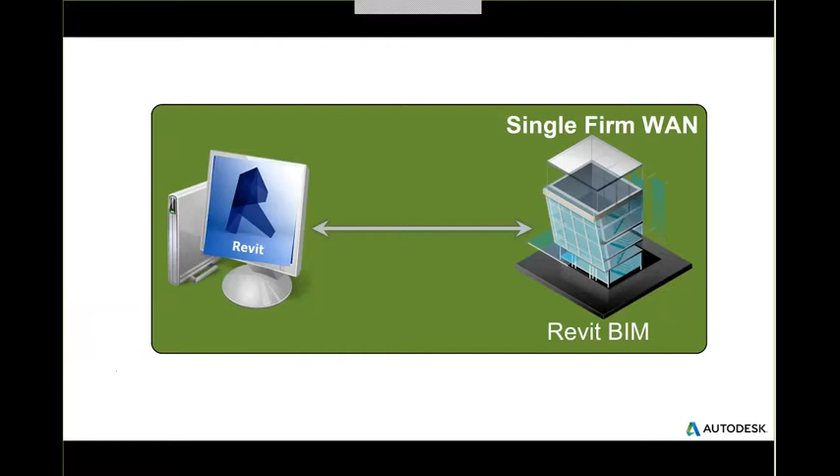So C4R is Collaboration for Revit. Revit is living inside the cloud. So the central file right here, when I say Revit is living inside the cloud, it's really the central file.

This central file is an essential tool for those who don't know Revit. Unlike AutoCAD, Revit has the technology where multiple people can work on a single file at the same time without overriding each other's data. That's a pretty big deal. It's much different from AutoCAD, where you do a lot of DWG linking and XREFing. Yes, you can still do that inside Revit, but Revit has central file capabilities.

For those who use Revit today, this is the part that's new to you: you can have your central file living in the cloud. With architecture firms, this is typically where architects ask us how they can get their engineers closer to them inside their project. In this case, architecture firm A has two offices, maybe one in Boston, one in Chicago. They're able to do that today with just their servers, typically using Revit Server with a private wide area network.

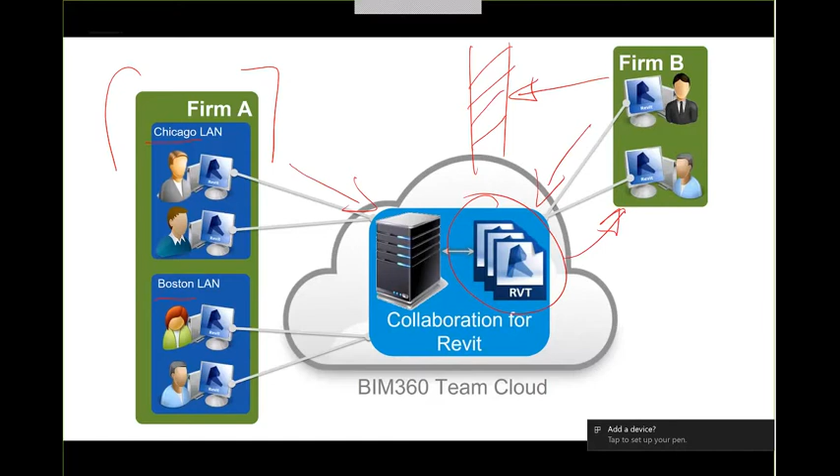But usually firm B, the engineering firm, could never get into their central file with them. So what Collaboration for Revit does, because the central files live in the cloud now, is let each firm go in through the cloud to access the central file, which is then pulled down from the cloud as a local file. Make no mistake—each person on this file can work on the exact same file at the exact same time.

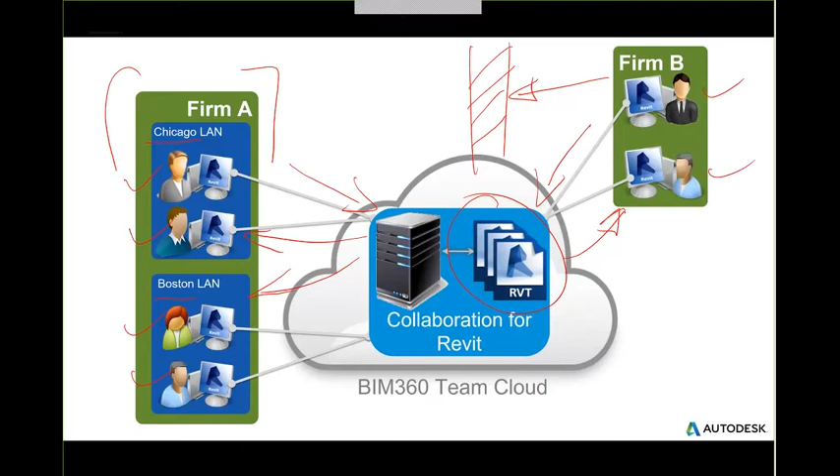Objects become locked out to individuals who access them, like a wall, a door, or a window. When I put in a wall, or put a door into a wall, it will lock those objects out to me until I save it back to the central file.

So in Collaboration for Revit, here's what it used to mean in the past. For firms to do this, they would have to buy servers, and use Revit Server software, which was free, but they would still have to use it. To manage other files like DWGs, doc files, and Excel files, they would use additional things like FTP storage.

Bringing it all together, the secret sauce was typically a VPN connection. To support all of this, there was typically an IT staff involved at the root of it all, and the poor project manager down here had to take a giant leap of faith to make sure everything was up and running the whole time for their team.

But now with C4R, the central file lives on the component called BIM 360 Team—that's where the central file is going to live, in the team cloud. The C4R tools are installed on each computer for anybody who needs to author in Revit.

And that's something really important to know: the licensing for C4R is per user. The question you'd ask yourself is how many people in our firm need to author in Revit on the central file at the same time with other people on this project. If the answer is 4, you'd get 4 licenses of C4R. The C4R licenses include the team cloud as well.

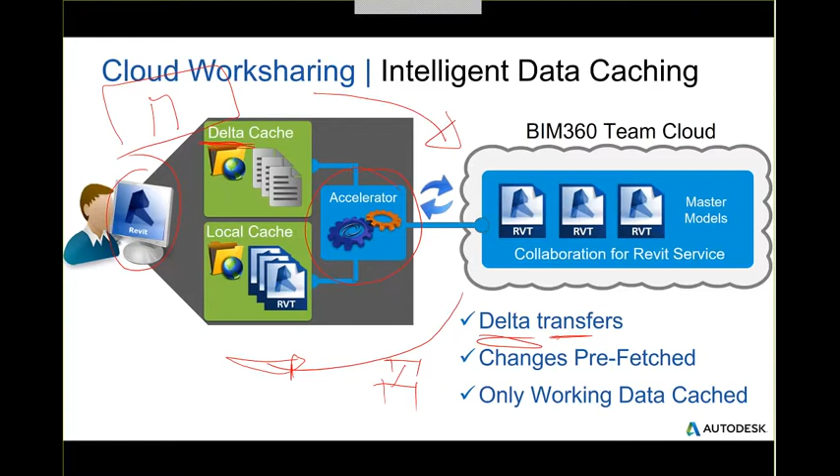You don't have to worry about that stuff. I'm just telling you in the background, this is what's happening. You just need to know that you can do your work.

Now, as far as the communication goes, this is part 2 of Collaboration for Revit. This enhanced communication really puts a tool into Revit that allows for communication. Let's face it, Revit isn't suited for communication today. I know people use Lync, Skype, some kind of messaging tools, but what we built into Collaboration for Revit is a tool called Communicator.

So any people inside your firm or outside your firm, when they're running Revit and they're signed in, you will see them logged into the Communicator. And if I log into Collaboration for Revit, there's my sunny smiley face right there, and I'll get to read the chats which have been happening throughout the communication window.

We can have team chats, we can have direct one-on-one chats. In this case, because I can see more than one person chatting, I'm part of a team chat, as well as being associated to more than one project, since with Collaboration for Revit you can work on more than one project at a time. If you buy the license for a year, you get to work on as many projects as you wish, with no restrictions.

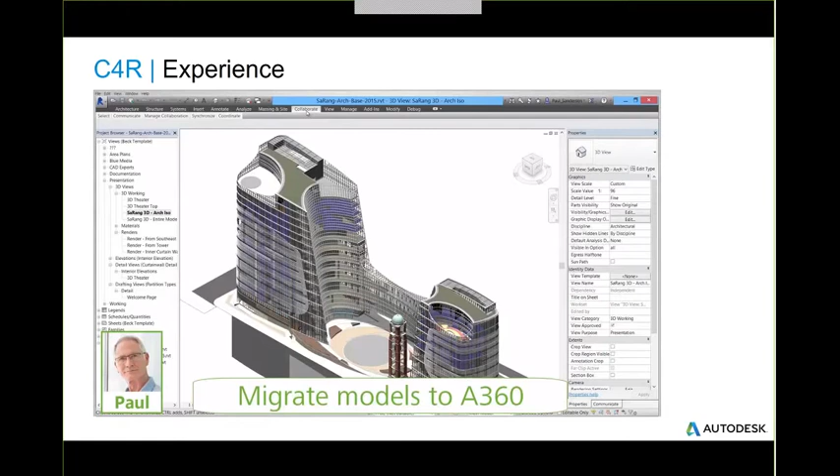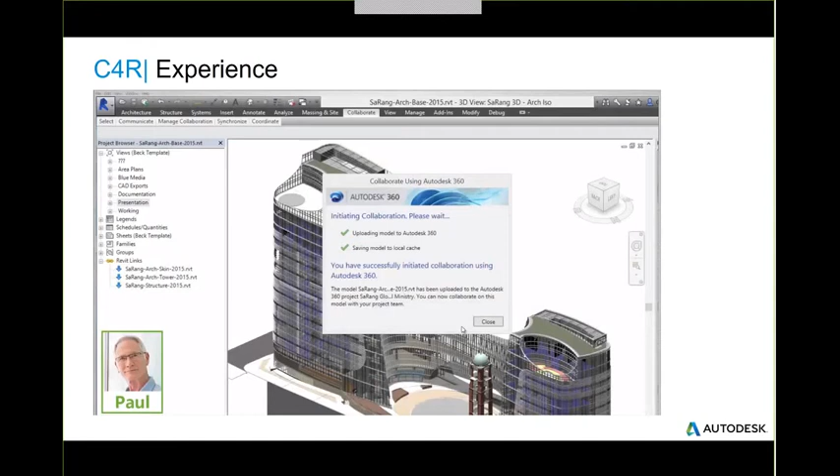So overall, the process looks like this: you save to central, choosing a project to which you're saving, and then Collaboration for Revit uploads that file. I'm going to show you that live, as well as showing the overall user experience. Now, specifically, I wanted to show you one more thing here. Let's bring up this file right here.

So C4R includes Team, but you folks out there that are not necessarily using Revit, and you have principals and directors who don't use CAD, but they want to access it, so they use things like PDF viewers that are not, let's say, Autodesk flavored. Team can really benefit everybody in a number of different ways. And this is where I really want to put the brakes on for everybody that's using siloed tools.

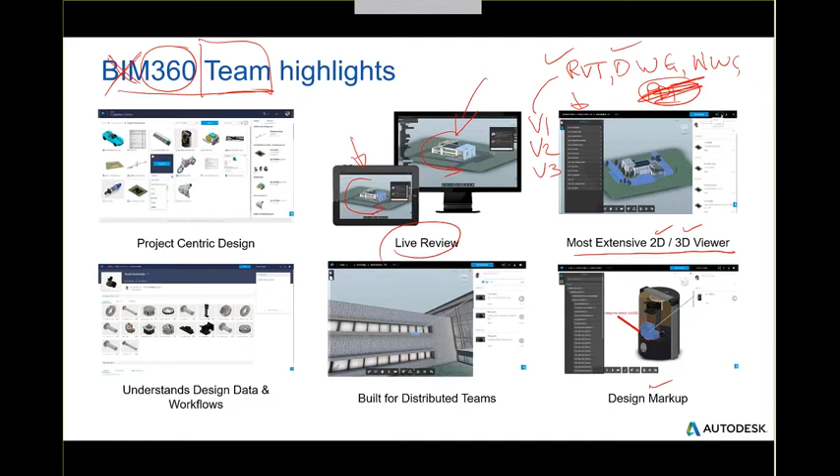One of the other competitive tools out there has a very similar live review process. We have the exact same thing in Team, where you can view the model, and as I spin this model around, somebody else using an iPad will see the model spin, because their camera perspective is my camera perspective, and we can slice and dice the model up and comment on it. And in virtually any format as well.

Again, you don't need to know this, but it's running Navisworks in the background. It's not a plugin, it's just a simple web viewer with an iOS application, which will come out in Android as well very soon. But it's iOS right now for your phone and your tablets. And that's the nice thing. It was designed for iOS in the beginning. And the simple tools are all common across these platforms. Drop dead easy to use.

And the tools of iPad and phone have an online, offline capability. If you go to a project and you don't have Wi-Fi accessibility, you can save these project files to go offline. So if you're in the airport as well or on a plane.

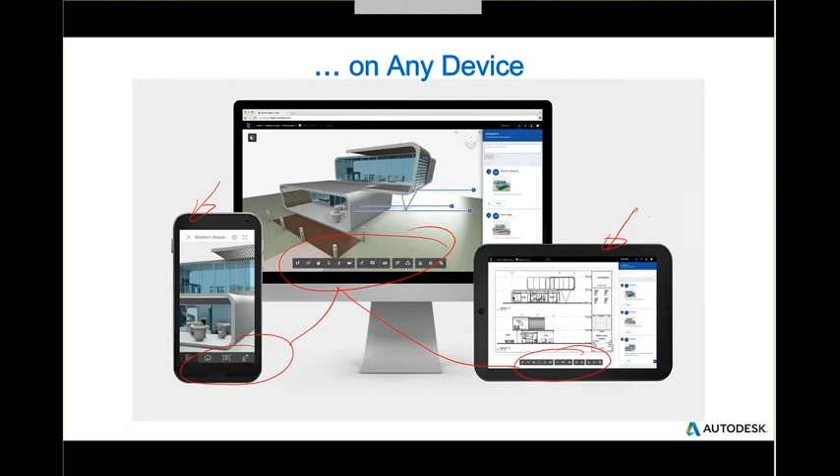So I'm going to skip through this and say what's included. What is included is this central file capability, working on a central file in Revit from the cloud. When you buy C4R, Team is included in this license. By the way, you start at 500 gigabytes per license, and the licenses can be pooled to pool data. Moral of the story here is, I don't think you're going to run out of data storage.

The Communicator chat is included. That Communicator window where we're doing the chatting, the save to central syncing. This model management and versioning is built into Team itself, so that's included. And the scalable licensing. This is a big deal, and essentially the scalable licensing means when you buy subscription licenses, you, as the administrator, allocate licenses to individuals in your group.

When or if you have people leave your office, maybe they go on to a project or a new job, you can revoke the license and then re-administer it to somebody else. So essentially, there is a return on investment with this, and what we say is if C4R can save just 10 minutes a week per person, it would literally pay for itself. Okay? So let's skip into this and take a look at what C4R looks like live.

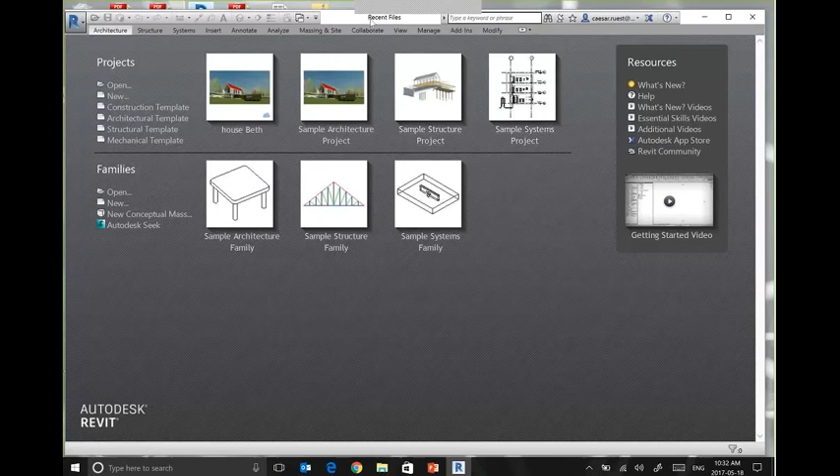So this is going to focus on the Revit side first. For those people that are AutoCAD, just stay tuned with me because I'm going to show what the Team side looks like in a moment. But this is Revit, and you can tell that I've got C4R on my system as well as I've started to use it. This file has a small moniker with a cloud, and you see the path?

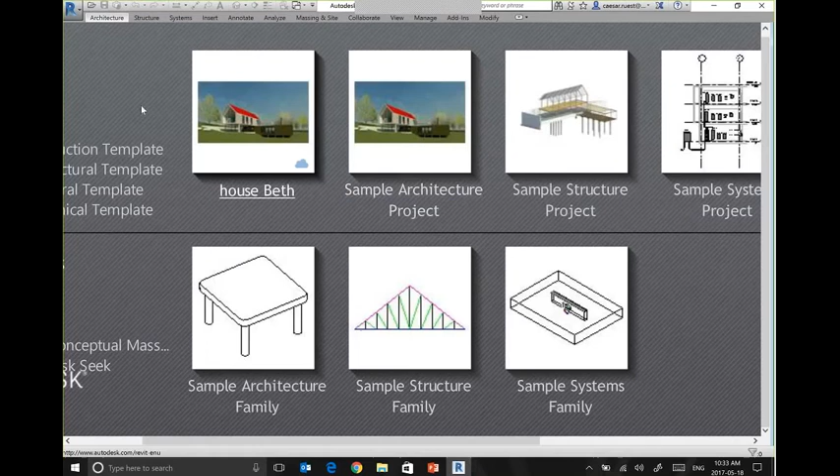So the path of this is BIM 360, the project of Skyscraper. The file in the cloud is called House Beth. This file is my C drive, and you can see it doesn't have the little moniker down here as well. And the other thing is with this, when I click on open, you'll also see here, because I have C4R installed, it'll put the shortcut of BIM 360 Team right here.

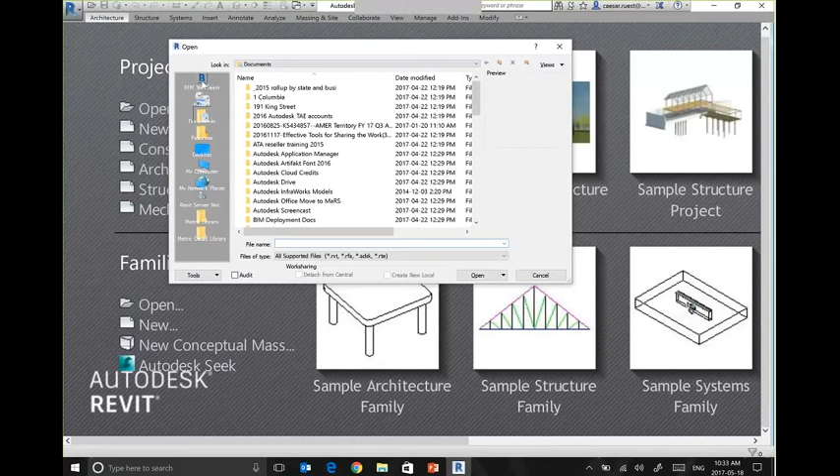So when I want to do file linking or open up files from the cloud, the files have to be in Team coming through Revit. But that being said, I can access Team right through here. Now let's open up this sample architectural project. This is a demo project that comes in every license of Revit, so nobody should be afraid of this project.

We have project sizes, by the way, of hundreds of megabytes in C4R, as well as small megabytes in C4R. We can handle very large projects down to small and medium-sized projects, so feel comfortable with that. This project is all set. Let's pretend that I just worked on this all morning, and I want to share this with my team to start engineering it mechanically as well as structurally.

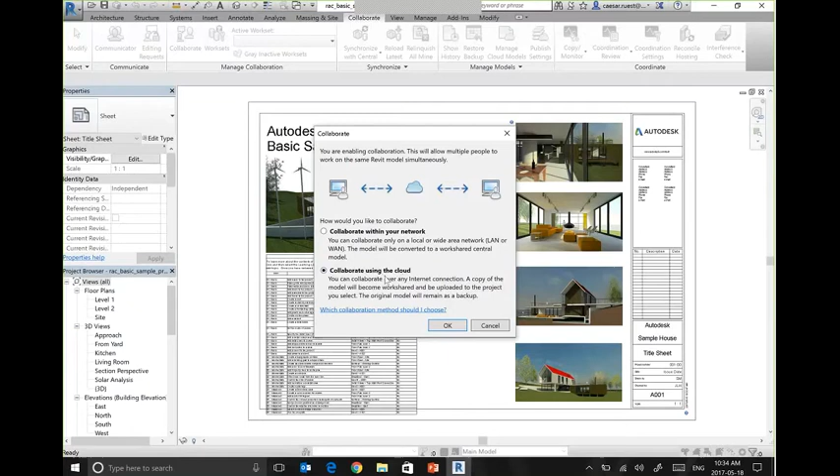My collaborate button will expose the collaborate function as well as the communicator function. So I want to collaborate. And collaborate will institute collaboration using the cloud. This is the beginning of C4R right here. And I'm going to say OK. Now, I want to rename this, and let's just call this House Rolo.

And it's asking me at this point, okay, Caesar, which cloud project site do you wish to send this to? So I have 1, 2, 3, 4, 5 project sites in the cloud. I have this skyscraper project in the cloud, and I want to send this file from my computer to the cloud site called skyscraper. And I'm going to initiate that.

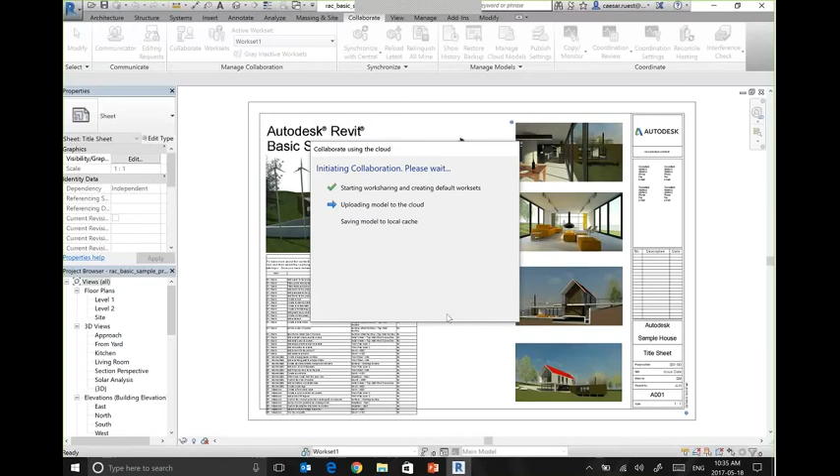So what it's doing, it's making this into a central file. It's creating the default work sets that get made with central files. You could also start from a central file with your own work sets and publish this to the cloud. But then once it pushes it to the cloud, it's going to then pull the model back to my computer as that linked central file, but it'll be a locally cached file on my computer, and we're done.

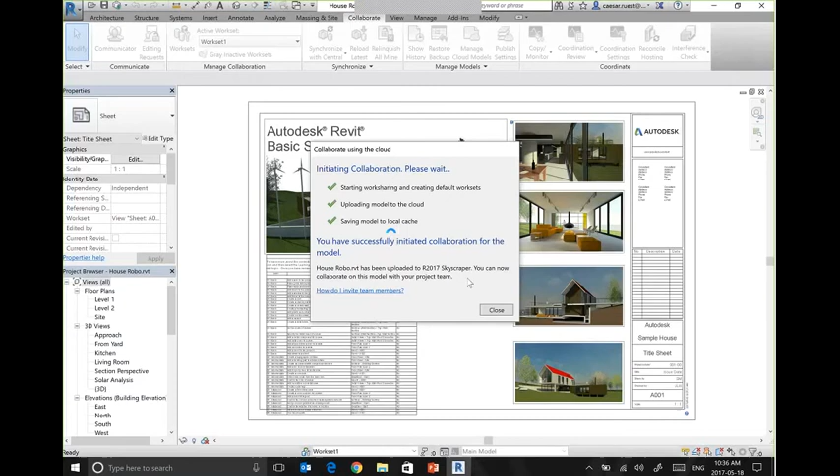So at this point in time, people think, okay, is Caesar working on a file that's in the cloud, right? And the answer is no. I'm always working on a locally cached file on my computer, but the link, the smart link, is to the cloud.

So whenever I would go and change the roof, I would be changing the roof model on my local file first, and then when I click on this icon right at the top here, this Save to Central, then it would update the roof in the central file for those to see it in my team. That's how collaboration for Revit works. Now, before we go to the cloud to show you where that file is, let me show you Communicator.

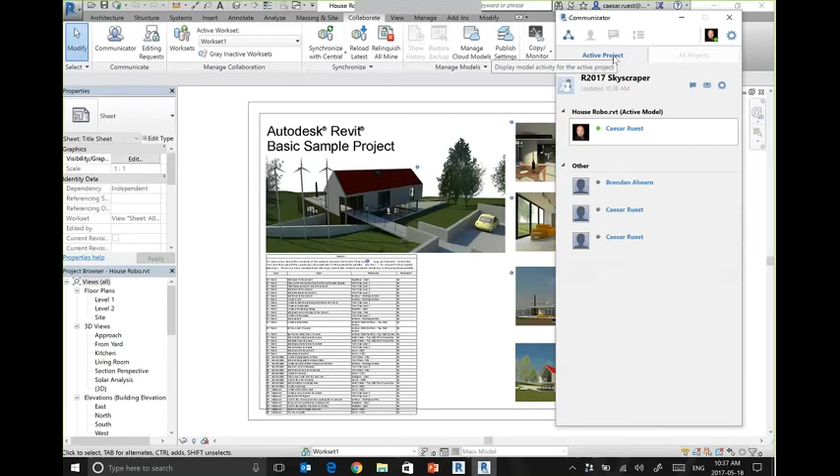So again, built into C4R, Communicator is only a Revit tool. It's not an AutoCAD tool. In this case here, you can see I'm online, obviously. It's got me as green. I don't have any other people inside of this project. My project name is Skyscraper. That's my active project. If I go to all projects, these are the associated projects to which I'm accorded to.

So for example, let's go into this Audubon project. And these are architects and engineers from different offices all on this Audubon project. And you can see, I can chat to one of these people inside of the project. I can send a message, an email message to everybody in this project.

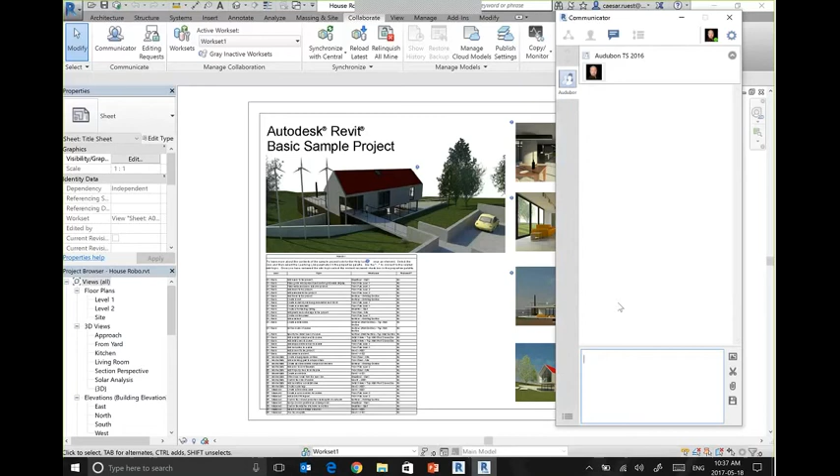Now, whenever I dig into this project, this is where the project becomes highlighted here on the side ribbon, but this is the historical information that you see. So when you dig back into the project, you can see all of these screen captures. Okay, the deadline shifted. Joe said this way back last year, and he did this screen capture.

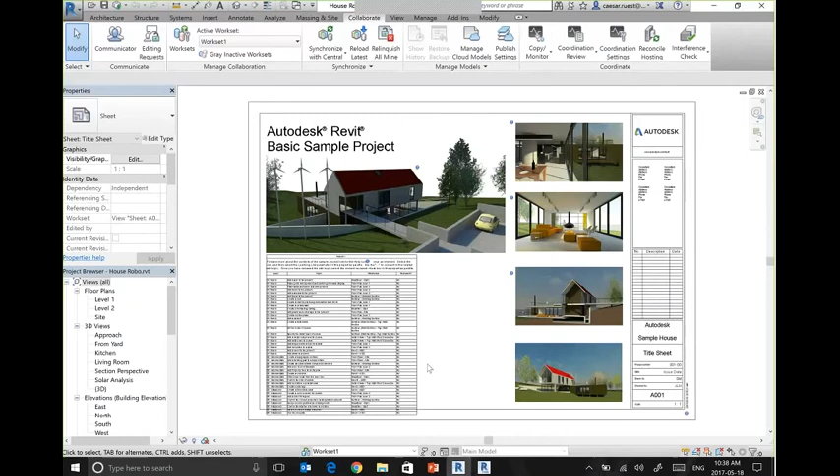And to do a screen capture, you just kind of zoom in to wherever you want to be on the screen. And then down here, you'll see these tools. You can send an image from your hard drive. You can do the screen capture. You can send a file, literally send like a PDF file or a document file right through this chat window. And then you can also export this chat history for posterity's sake.

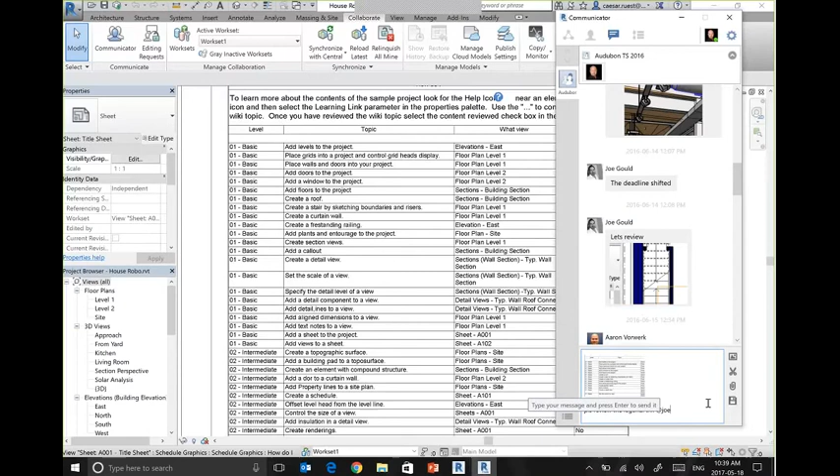So let's capture this screen. Let's capture this chunk of the screen and capture. And now we can say whatever we want to say, like please review the legend. And you can do things like @Joe or something like that, so that Joe knows that I'm talking to him. I could have sent this chat directly to him, but I'm sending this out to the entire team. So that's the chat window.

And then the timeline window is where you can see the sync to central. So like I said, as long as you're in a project, so I'm in this R 2017 Skyscraper project, anybody that saves a file to this project from Revit, you will get to see which file they're saving to Central and who is saving it, as well as the comments they are adding every time they sync to Central. Okay, so this is all here historical, which is actually very fantastic.

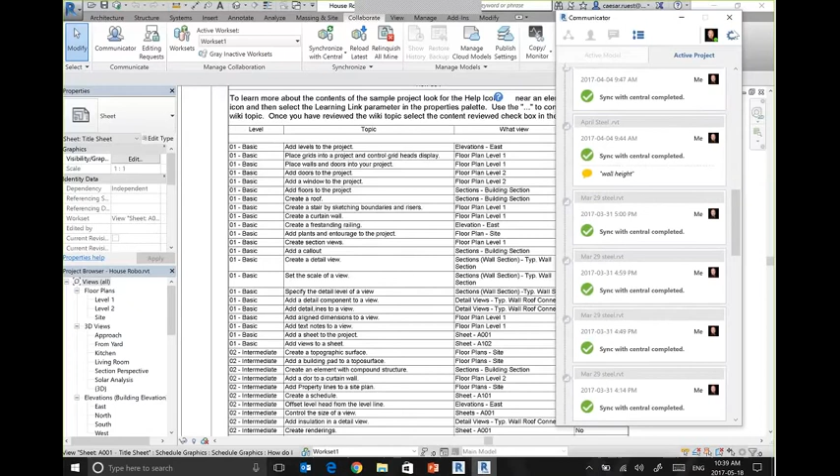You don't realize how good the tool is until you start using it. You kind of wonder, am I really going to use that? It's kind of like a new feature on a car. Am I really going to use the keyless entry of my car? It seems kind of wishy-washy at first, but as soon as you start using it, you kind of wonder, I couldn't have lived without it.

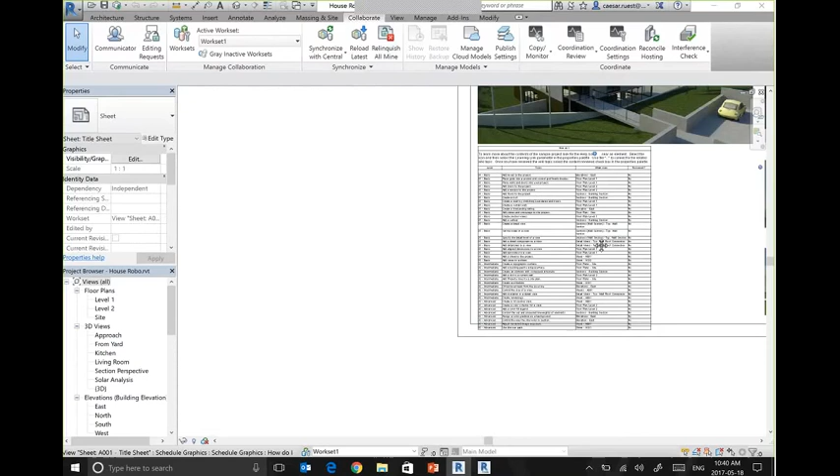Now that's the Communicator. And here's the last thing I want to show you within the Collaborate tab. Those of you that are architects and engineers, you might really appreciate this, specifically in Revit. You know that in Revit, you create sheets, and they're part of the entire file. So my sheets are all here, sheets 1 to 5. Now, as an architect, I would typically work on one sheet and not necessarily complete it. So what you can do is actually publish your Revit file with only those sheets and those 3D views that you want to share with your people.

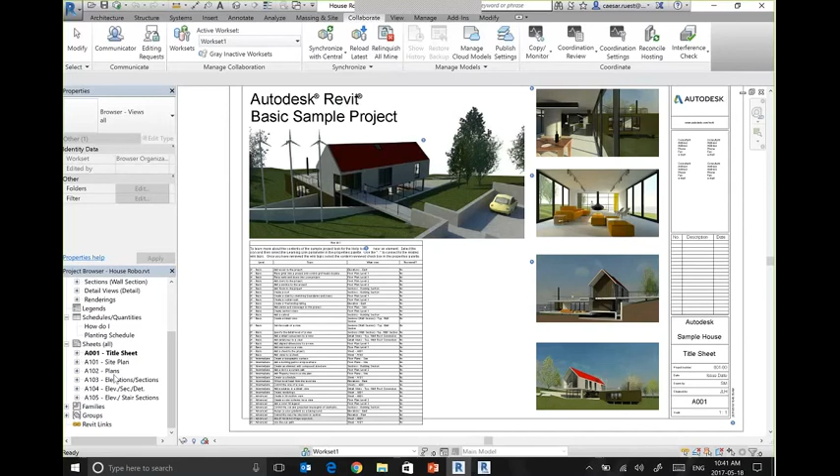So publishing is how the file gets versioned inside of Collaboration for Revit. So if I wanted to publish only the title sheet and the plans and the 3D views, like this 3D view right here, then only those people who have access to Team will only see the sheets called Plan and this 3D view. The publishing tool is your best tool for doing progress sets so that people who are doing review only see the data that they need to see. That's really important. That's built into Revit today, but it's highlighted here inside of the Collaborate tab.

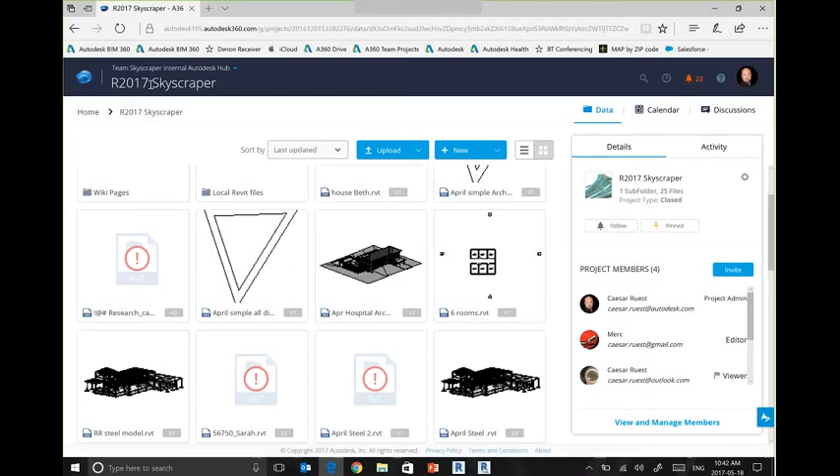So let's fast forward. Let's gain everybody's attention back. Everybody that's AutoCAD, everybody that's Revit. This is more important. If you have anybody that doesn't want to touch AutoCAD, but wants to review drawings and mark up drawings, they need to see this. This is Team. This is the project that I just published this out to. So for example here, my project called Skyscraper, you're looking at the BIM 360 Team website.

And like I said, if you don't use Revit in your office, you can still buy BIM 360 Team separately instead of buying Collaboration for Revit, because obviously you don't have Revit. You would buy Team separately, and you would use that on your AutoCAD flavored projects. Okay, so Team, when you jump into it, these are your Team hubs. So I have my own personal hub. I have a hub which I'm also associated with. These are the projects in my hub.

Inside of each of these projects, there are different project members. So I made this project Skyscraper. Here are the project participants. I have Caesar, I've got Merc, and then I've got this other guy named Caesar, and then I've got Brendan. And you can see their permission levels.

This is how you view and add new users. You just click on invite, and you just send them an email. Blah, blah, blah. And I want to make you an editor or a viewer. It's drop dead simple. Okay? If you want to know what the difference is between the two, you click on the question mark.

So viewing lets you do commenting, viewing, posts, accessing conversations. If you want to do shared files and stuff like that, then you need to be editor: moving, copying, rotating, and inviting other people, editor. And then project admin lets you actually approve people coming into the project.

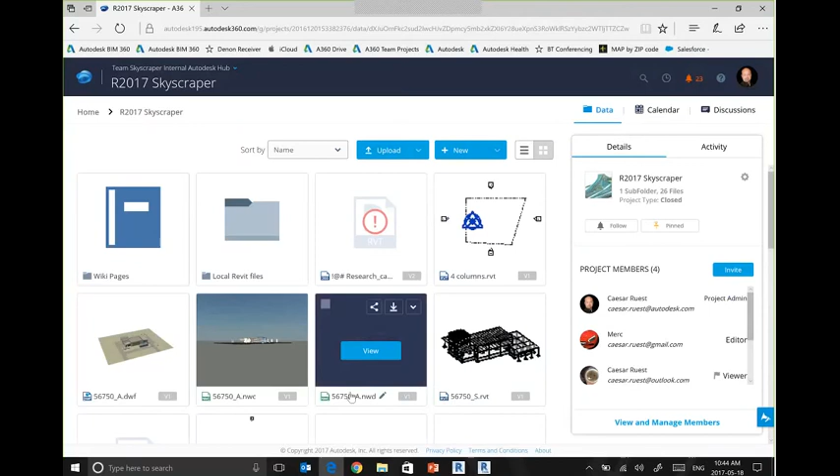Now, the nice thing about Team is you can see it thumbnailed. This is a list view, but you can also see it thumbnailed. And inside of here, I've got a Navisworks file. I've got my Revit files, a DWF file. I've even got the AutoCAD files in here somewhere. There's my Bethlehem. There's my house robo file. You can see the preview of it.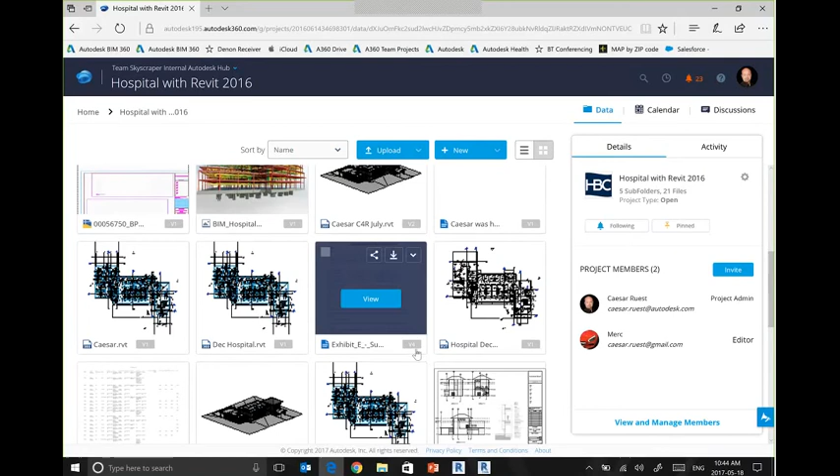Let me go into a file which has a little bit of a history behind it, because right now that was just a freshly published file. Let me go into this hospital. So here's some AutoCAD files. You can see the title blocks kind of showing up. There's a JPEG. Oh, here's a Microsoft document file, and it's on version 4. Here's a Microsoft Excel file, and it's on version 2.

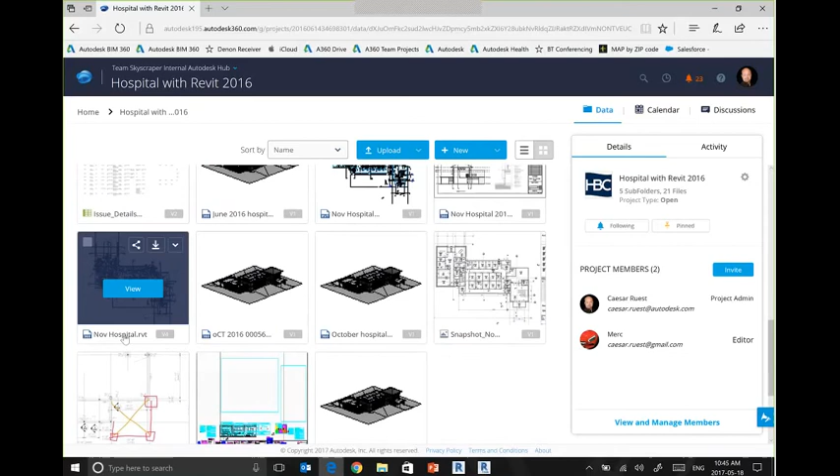You can view natively in Team, you can view doc files and Excel files. You can't mark them up, but you don't need an extra browser, or you don't need Microsoft Word to view it. You can view it right here. Now, let's dig into one file that I've been beating up on quite a bit. This one right here, Hospital, November. This is on version 4.

This is a Revit file, and this is a published Revit file. The nice thing about the Revit files are they will never be touching your master central file. They'll always be touching your published file. And they would get to do and see things like this. When you see the file come into it the first time, I always recommend go into the overview of the file. And this overview shows you, this is version 4, 25 megabyte file. This has 4 sheets in it.

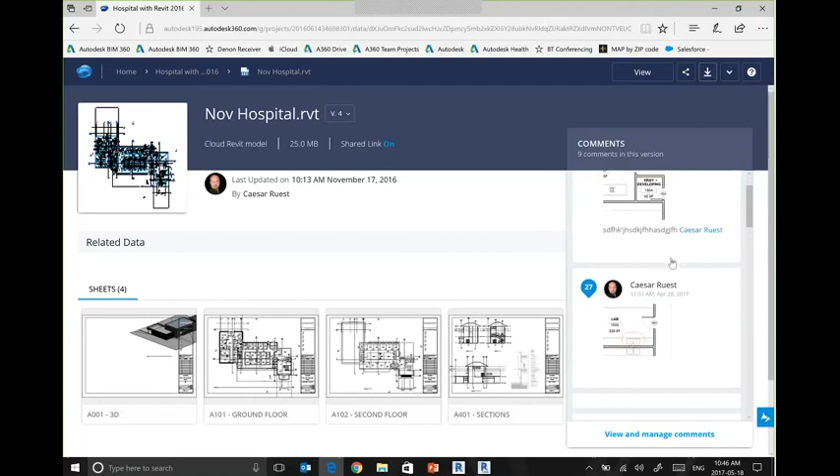And the comment trail, or the history, shows me that in version 4, there were 9 redline or issue comments created. You can see the small thumbnails here. And as I scroll down, you will also see, just in a second, version 3. And in version 3, I also have some capabilities. I have these different capabilities that I wanted to associate with. So let's dig into it a little bit more. I'm going to scroll down.

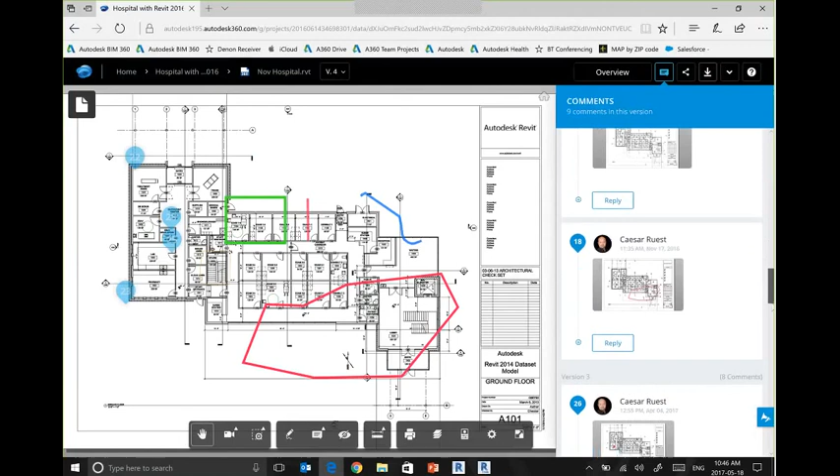This is the one I really want to look at. This is a workflow that makes sense to everybody that's architecture and engineering. At the beginning, Caesar said, add the wall and door to the corridor. So let's click on this thumbnail. It'll bring this markup full on to the screen, right? So here's the architect said, add the wall and door in the corridor, and then move the exam room walls. So you can see, like everybody knows what this means, right? Move these walls to here and do this.

And then the project manager says, I approve this move. And then the Revit user says, okay, I'll do it, right? So you would put this markup on the side screen. These markups don't overlay on Revit. This remains static right here. But I would go ahead and do this move in Revit, and then I would respond back to say, hey, the move is done.

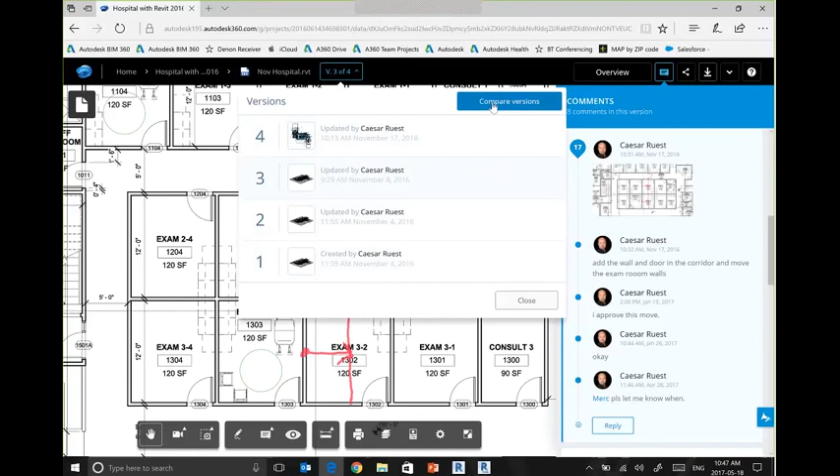Once the move is done, that means I've uploaded version 4. So as the project manager who just approved this move, let's play the role of the project manager right now. So I want to compare versions, and check this out. I have versions 1, 2, 3, 4, who did the updates when, and compare versions. So now I'm going to go in and compare version 4 versus 3 on the ground floor sheet and go.

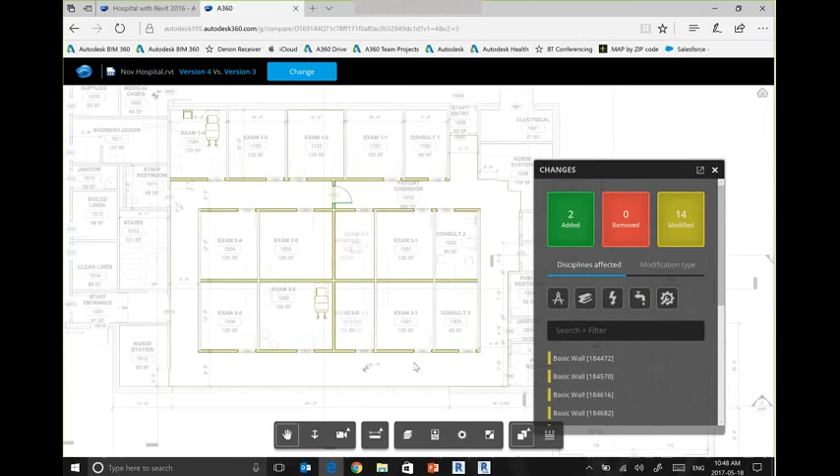So the taskbar is actually loading in version 4, version 3. It's doing the comparison, and this is the killer stuff. Because it's Revit, the comparison is at an object level. This is absolutely sweet. So, I was dumbfounded when I first saw this. It's like, wow, this is cool.

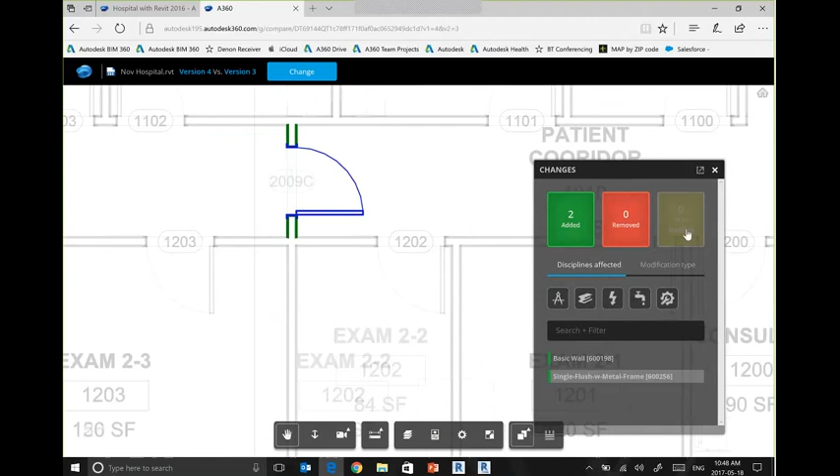These are buttons. So what's in yellow, and turn that button off, you can see what is green now is right here. It's at an object level identifying that this wall and this door, pulling out the properties. So, okay, that's cool. But the sweetest part about this when I saw this was this.

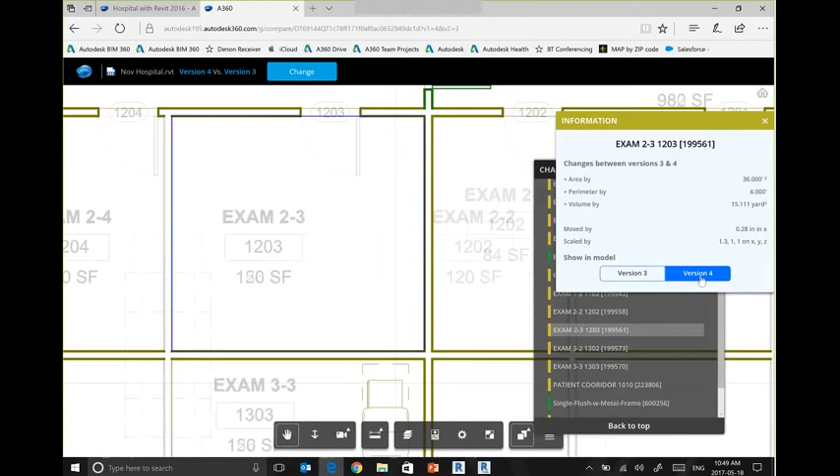It's not only cool, it's useful to actually visually see the movements of the object information and the extrapolation of the data. That is killer. And then from here, these are the markup tools. Down here, you've got the measurement tool. When you get out of the compare, you'll do the markups, but that's killer stuff. Yeah, here we go. Markup, comment, turn everything off.

So there's nothing stopping you. You can still come back here and mark up. You've got a freehand tool. You've got arrow tools and such. Okay, let's cancel that out because I really don't want to start marking this example up.

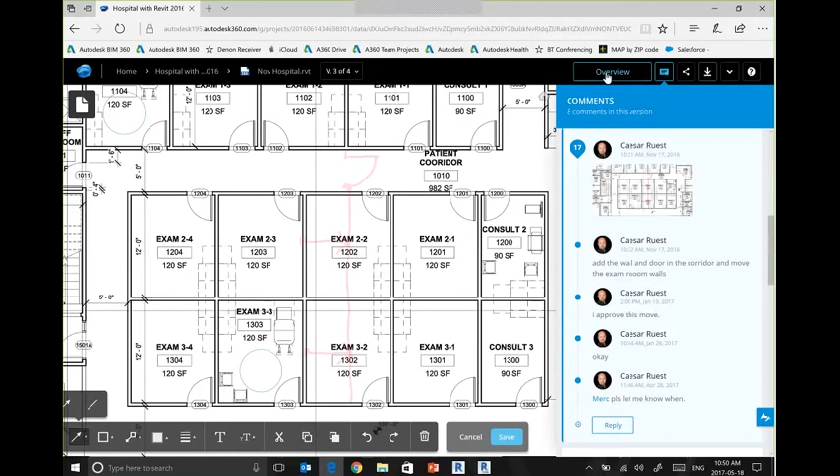But in a nutshell, that is collaboration for Revit, respecting DWG, RVT, PDF, DOC, XLS. It has a lot more capabilities in here. We could do a whole webinar on just Team because it has things like the calendar, a discussion thread. It also has something in here called the wiki where you can put in all kinds of project notes. Your folder structure can be set up.

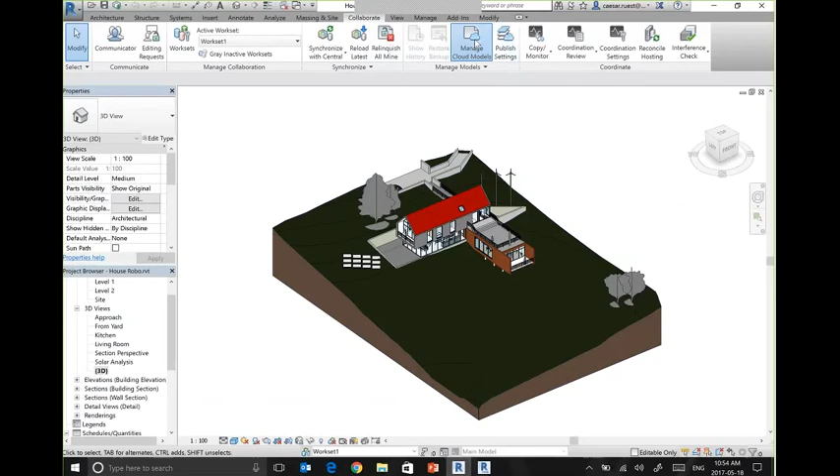Are the Revit models version dependent? So for versioning, whenever you publish, remember I was showing that publish feature inside of Revit. When you publish, it'll be published out as the same Revit file name. And because it's published to the same site with the same file name, it will automatically version for you. I'm having a little trouble with my screen resolution.

You can just barely see one of the files. When I click on this symbol called publish, it will go ahead and update the version that's in the cloud on the team site. If it was a brand new file overall, of course it's not going to version, but we'll take care of that versioning.

Back in Revit, this is important to know, you can actually go back into the versions and come back and restore past versions if you wish. I've seen this happen where an architect would have somebody new come on the project, and all of a sudden, all of the fluff just hit the fan. Like they did something on the project where it's like, that's not your best day in the office. We need to restore the past version. So you would do that right through here inside of Revit, just as you would in the past.

And that's a nice piece of Revit. But that being said, for those people that are on AutoCAD or even Microsoft Documents, you can come into the versions, and then you can come and restore past versions and make them current.

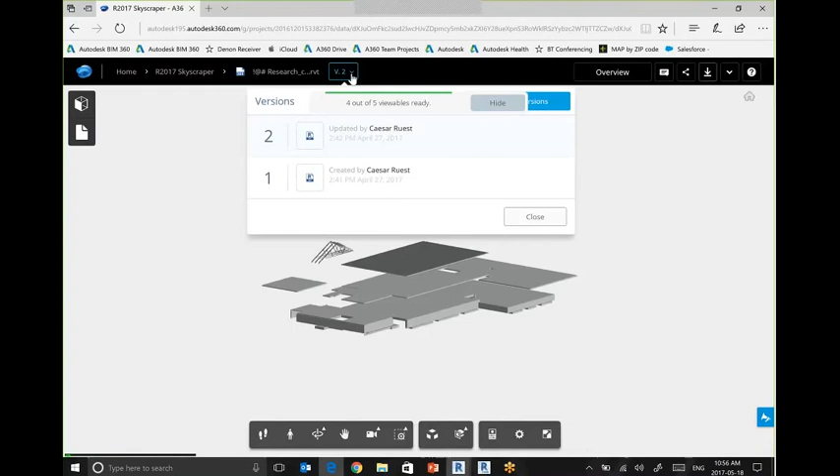Okay, I think Caesar, that's great. What the question really was: are the models still version dependent? In other words, Revit 2015, 2016, right? I think that's the question. In other words, is C4R and BIM 360 independent of the version of Revit that the project is being done in?

Okay. So specifically, C4R will run on specific versions of Revit. It started in 2015. So when you're running C4R, you will be running it on a version of Revit. When a project is set up, whatever file lands in there first sets the version. So for example, if you're in Revit 2016 in a project folder, and the project folder was published from Revit using Collaboration for Revit in 2016, that project itself will become a flavored project of 2016, a version project of 2016. That is the way it works today.

So if you're in 2017, your project will be versioned as 2017 and will require 2017 to work in. So again, just to recap, the C4R will work on version 2015 and later, correct? Correct. But the caveat remains.